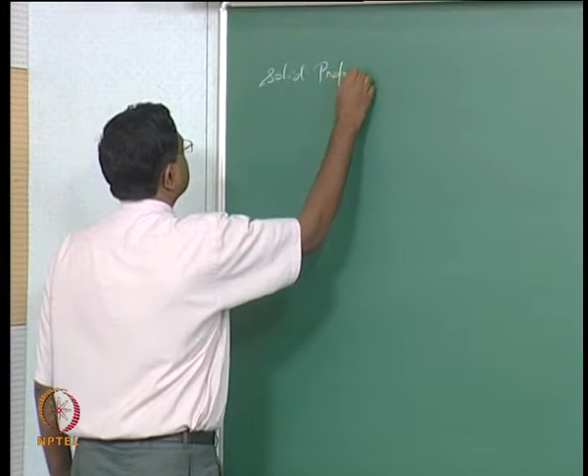The reason why we are actually going through all these things in quick succession is to point out that, as far as this course is concerned, whatever we have learned on laminar premix flames and laminar diffusion flames is actually applicable in the context of more complicated application oriented areas, except that the situation is complicated by a lot of other things. For example, in sprays it's complicated by the spray statistics, the diameter distribution and so on. In the case of solid propellant combustion we will see what else happens, and then we will move on to turbulent combustion also to show that the basics we have learnt will be applicable there, and how it's complicated by the turbulence and so on.

So in the case of solid propellant combustion, what we need to understand is essentially we have to look at two cases. One is homogeneous propellants, and the other one is heterogeneous propellants.

The term propellant actually means that both the fuel and oxidizer are available in solid form together, and the question basically is to what level they are really mixed together. So in the case of homogeneous propellants, they are actually mixed up to the molecular level. So fuel and oxidizer are mixed at molecular level.

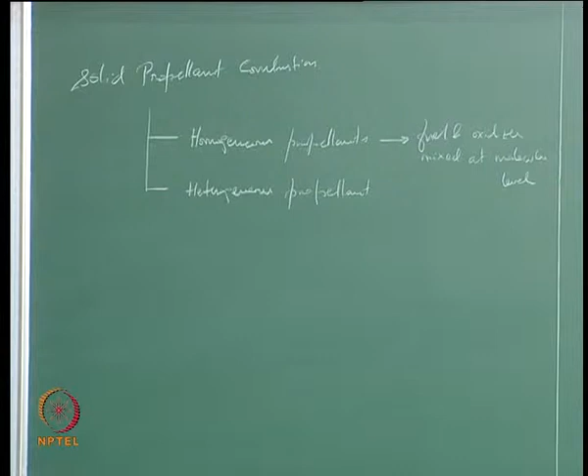That means when you now have a source of heat that ignites it, and then the combustion keeps going under steady state conditions, essentially what happens is the solid gets heated up and it is thermally unstable, so it decomposes into gas phase products. The gas phase products are essentially gas phase fuel molecules and oxidizer molecules, which then in turn break down further to react in a gas phase flame, and the gas phase flame releases a lot of heat that goes back to giving rise to the condensed phase decomposition products of fuel and oxidizer molecules in the gas phase. So that's how it happens.

As a matter of fact, when we're looking at liquid droplets, there are also monopropellant liquid droplets, where you can actually have a premix flame surrounding the monopropellant liquid droplet, and it pyrolyzes the droplet, and the droplet decomposes into gas phase fuel and oxidizer molecules that react in the gas phase flame. So a similar idea essentially prevails for homogeneous propellants.

An example of this is the most common thing, what is called double base propellants. It's called double base because it's actually a combination of nitroglycerine and nitrocellulose. They are mixed together such that they form a mixture at the molecular level, and then they decompose into a gas phase fuel and oxidizer.

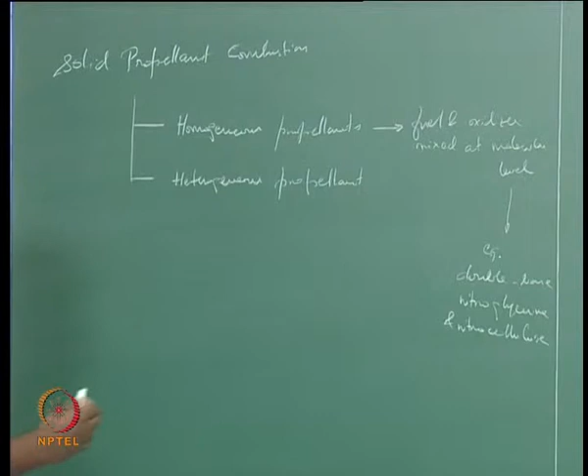On the other hand, before we move on to heterogeneous propellants, obviously what we are looking at here essentially should give rise to a premixed gas phase flame, and so you can think about a premixed gas phase flame where the preheat zone now extends into the solid, because the preheat zone essentially is where the heat conduction happens, and the heat conduction now happens into the solid, heating it up from its initial temperature up to a surface temperature that needs to be determined as part of the problem.

This surface temperature is determined by supplying interface boundary conditions between the solid and the gas phase, and in addition to that you still have the same eigenvalue problem, which is you have to find out the burning rate of the solid, or the rate at which the surface regresses. That's essentially similar to the way we did the gas phase flame one-dimensional flame structure analysis. In the case of heterogeneous propellants, essentially the fuel and oxidizer are mixed at a particulate level.

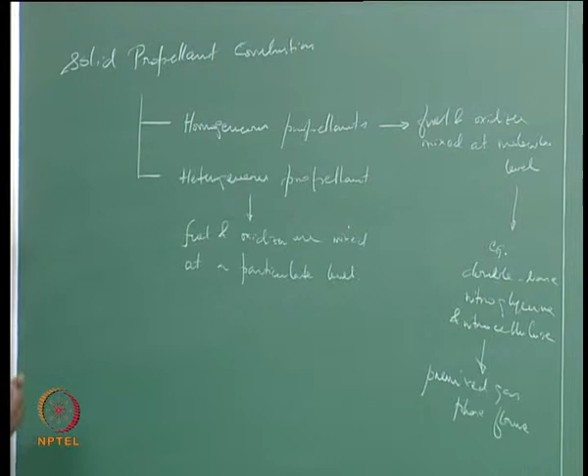This is very typical, though it doesn't have to be exactly followed this way. Typically we have a solid oxidizer powder, which is a chemical salt, and the most typical one used is ammonium perchlorate. It looks like common salt particles, but can come in various particle sizes, and these particles are embedded in a polymeric fuel.

This starts out with a polymer that is a highly viscous liquid into which you mix things, and then you set this polymer to become a solid. So the fuel is essentially a polymer that also acts as a binder that binds the particles. You can also throw in metal particles as further fuel, but the metal combustion actually happens outside of the combustion between the fuel and oxidizer.

Effectively, the binder and oxidizer combustion propagates the flame into the solid, caused by a flame between the fuel and oxidizer. So this is going to actually look like it has a lot of solid particles.

Typically these particles are about 200 to 300 microns in size. The finer ones could be as fine as 5 microns or even 1 micron in extreme cases, but typically it's on the order of 50 to 70 microns, 80 microns, maybe at most 100 microns. So essentially you try to have a very tight pack of large solid particles, and then pack the crevices formed between these big particles with further smaller particles.

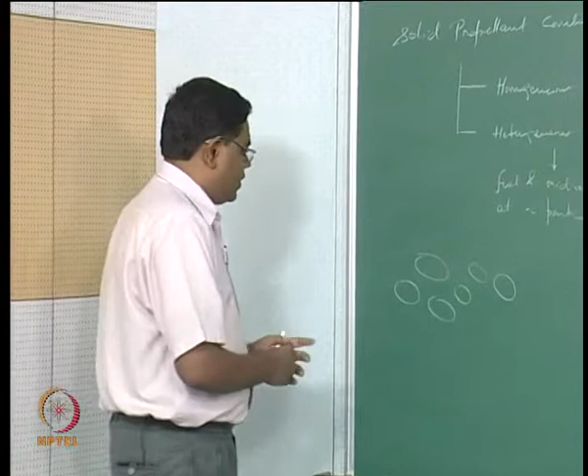So now you get these particles, and a binder binding the whole thing together. Microscopically, when a flame is trying to eat into this, it is obviously not going to be a premixed flame. Even at the microscopic level, suppose we hypothetically cut it with a surface like this, and say that is now the burning surface. Obviously the burning surface is not going to be as flat as this, and we'll see how the non-planarity develops.

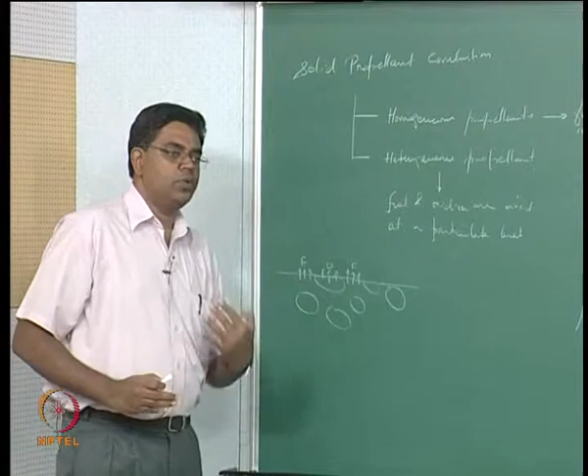But let's suppose this is what we want to think about: you have an exposed area of oxidizer giving rise to oxidizer vapor, and an exposed area of binder giving rise to fuel vapor. So fuel here, oxidizer here, fuel here - if you look at it like this, within this region it's sort of like the inverse of the Burke-Schumann problem. The Burke-Schumann problem had fuel in the core and oxidizer on the sides, but here we're essentially looking at two different reactant species coming out in this fashion.

So we expect to actually have a diffusion flame associated with this. Recall we talked about flux boundary conditions, so we can deliberately ask where exactly the stoichiometric surface is going to attach - is it at the contact between the oxidizer and fuel, or away? These kinds of issues remain to be discussed in these problems.

But we also talked, when discussing diffusion flames, about finite chemistry effects, particularly near the leading edge, and found that we need something like a leading edge flame or a triple flame structure. That is pretty much expected in these propellants, because it turns out that the oxidizer is actually a monopropellant by itself. It can burn by itself, but we need the binder to hold the oxidizer particles together and push it closer to a stoichiometric situation. Therefore you essentially have an oxidizer-rich reactive mixture, and in fact it can also go through self deflagration.

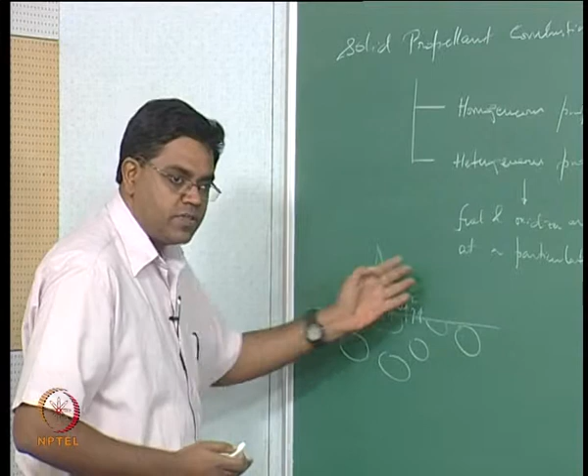So you do have a self deflagration flame of the oxidizer very close to the oxidizer particle, out of which you now get oxidizer-rich products of this flame, which mix with the binder fuel gaseous species. Since you now have an oxidizer-rich species, you're going to have more like a triple flame rather than a diffusion flame that extends all the way.

Typically modelers have identified that you now have a monopropellant flame for the ammonium perchlorate, then what's called a primary flame - the diffusion flame coming from the triple flame idea at the corners - and then the trailing diffusion flame. So a typical idea of multiple flames prevails for what are called composite propellants.

Heterogeneous propellants are also generally termed composite propellants because they are composites of particulates in a binder, similar to composite materials and structures. The popular idea is that you have multiple flames of different structure prevailing on top, and you also have aluminum metal particles embedded in it.

Aluminum is thermally very stable, so as it comes out it accumulates on the burning surface because it is just barely getting melted at that time, it is not ready to actually get evaporated.

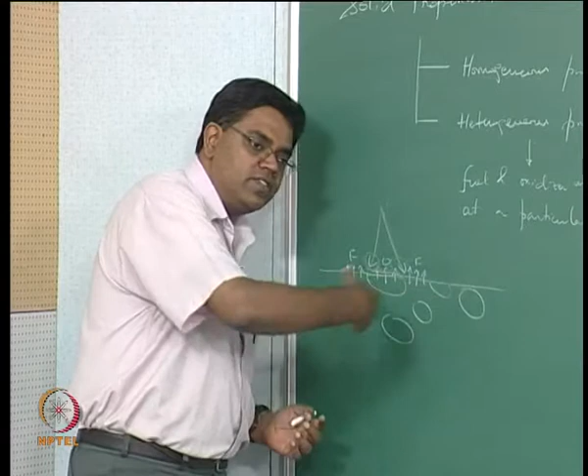As it accumulates, it forms a sintered web and gets heated up by the gas phase flame complex, ultimately reaching an ignition temperature by which it gets ignited. The sintered web then rolls out, goes up, and starts burning as a bigger agglomerate than the individual particles we originally had.

That's a complex problem with a lot of ramifications in solid rocket performance where these kinds of propellants are used. All I want to point out is we've discussed many of these issues in trying to do laminar flames earlier, and all these ideas remain here as well.

So we now want to do a similar overview of turbulent combustion. To say we want to just give an overview of turbulent combustion is extremely unfair, because it's a subject that has spawned a huge amount of literature. A lot of scientists have been working on it, and turbulent combustion is one of the things that has funded a lot of combustion research in the last many decades.

That's primarily because most practical combustion, barring some situations happening at very microscopic scales where the Reynolds numbers are so small, is turbulent in nature. So we're looking at gas turbine combustors, liquid rocket combustors, furnaces, boilers and so on. In most combustion situations you're going through, you have turbulent flow.

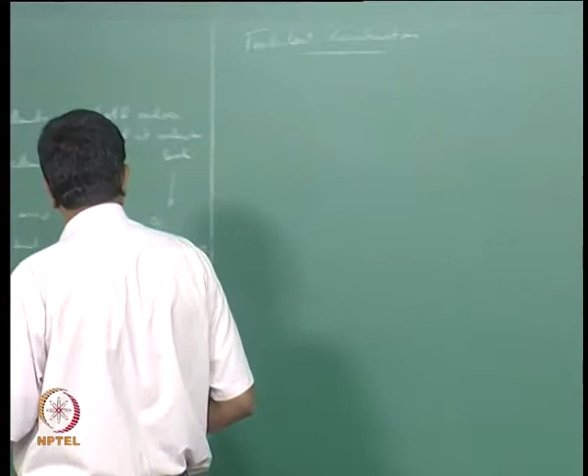Similarly, we have to go back a little and get a quick overview of what is turbulent about turbulent combustion. That means we have to look at what turbulence is in general. We will try to restrict what we're doing here to the context of turbulent jet flames.

When I say turbulent jet flames, I'll talk about both premix flames and non-premix flames. So consider turbulent jet flames - this is very generic, because essentially if you have a little nozzle from which a gas comes out at turbulent speeds, like a jet, you'll have a lot of eddies here and there.

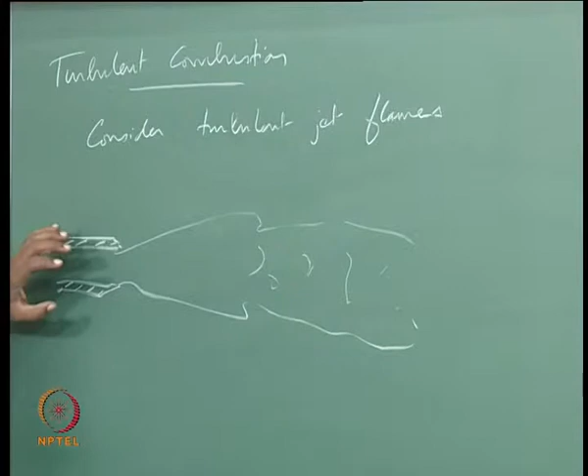It's a caricature that I don't want to elaborate too much on. So we now have a large turbulent jet. You can think of this as coming out of a burner fitted to a combustor or a furnace - this is a very practical situation you come across in many applications.

When you say turbulent premix flames, you could think of a reactant mixture coming out here and then letting in air from the sides entering the jet. Or for a turbulent non-premix flame, you could say I have only fuel coming through this, entraining air around it, and then you have a flame.

So either way, depending on how that happens - if you now have premixed reactants, you're going to have a highly wrinkled premixed flame that burns and consumes all the reactants within a very short distance. And recall, if you now have only fuel, you're going to have a diffusion flame.

The picture I'm drawing is essentially something like the stoichiometric surface. Just like how we did the Burke-Schumann problem, if you mark the mixture fraction corresponding to the stoichiometric contour, you now get a turbulent flame. What's turbulent about it? You now have fluctuations that keep happening.

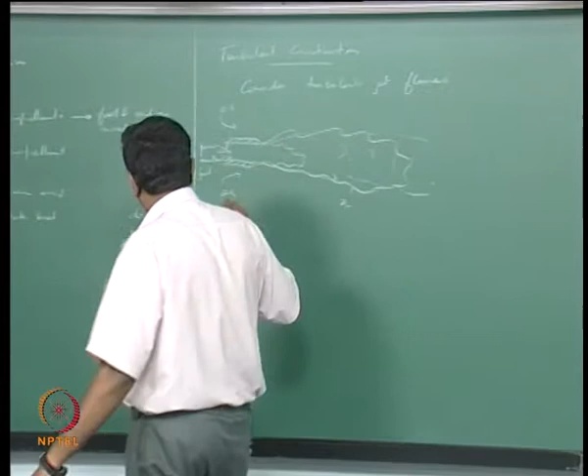The next snapshot you take is not going to exactly follow the same contour. This is an instantaneous picture, so the next one is going to be slightly different, and the third one is going to be slightly different.

Then you keep taking these snapshots and put them on top of each other. You now get lots of these curves which form a band, and that is what you would call a turbulent flame brush. It essentially causes a brush-like structure in an ensemble-averaged manner.

Similarly, for the premix flame, let's go back and think about the laminar situation. We talked about the Bunsen burner experiment, where you have a hole at the bottom allowing air entrainment, setting up a premix flame. Then you start closing the hole gradually, converting this premix flame into a diffusion flame. We find that the diffusion flame is a lot taller compared to the premix flame.

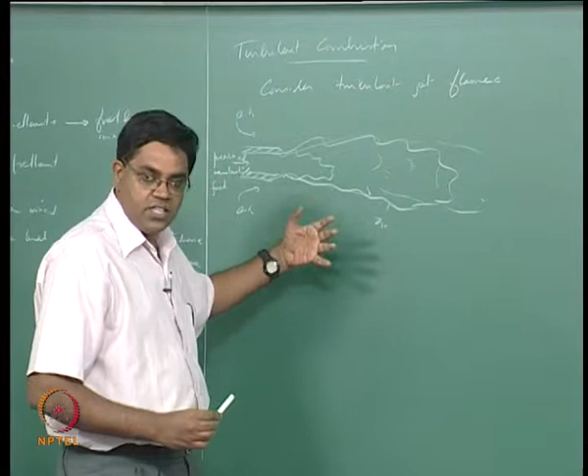A very similar situation exists for turbulent flames, simply because in diffusion flames, combustion is diffusion controlled, so the heat release isn't as intense, because the chemical reactions are waiting for mixing to happen. Whereas in the premix flame, you don't have that constraint, so the heat release is kinetically controlled, and you get a lot of heat release within a very short region.

So the volumetric heating load from a premix flame is a lot higher compared to a diffusion flame. For this reason, for the same thermal loading—meaning the amount of fuel you're trying to burn at a particular rate—your premix flames are typically very compact compared to diffusion flames. This is true both in laminar and turbulent flows.

If you want to think about this, just like I described the stoichiometric surface for the diffusion flame, you could also think about a local turbulent flame speed that is trying to match the flow and set itself up. And there we have a little problem.

Am I going to say this instantaneous flame is the one traveling at a turbulent flame speed, or is it like a turbulent premix flame brush that is traveling at a turbulent flame speed? So the notion of what's a turbulent flame speed is a little difficult to think about, and we will have to talk about it in greater detail shortly.

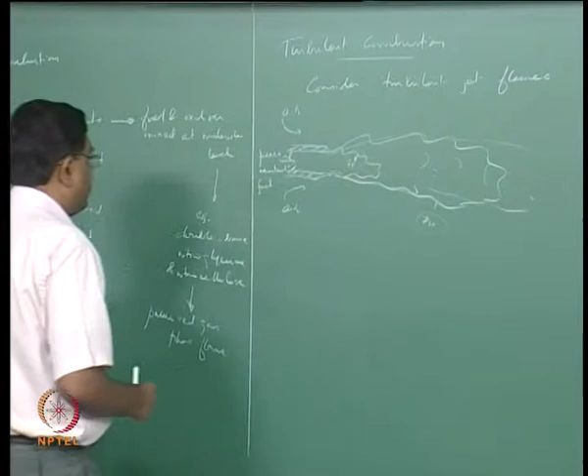The first thing I'm hinting at is, if you're completely ignorant, we will now have to talk about something called a turbulent flame speed as opposed to a laminar flame speed. We got a hint of it when we used SL, where L is a subscript indicating laminar, and I pointed out that when we think about turbulent flames, we will have to alter that. The point I'm trying to make is the ideas we had—like the flame speed balancing the normal component of the flow—those ideas will remain. That is not going to change.

If you want to think about all these things, the first thing we have to do is forget about flames for a moment. We will now look only at the term turbulent jet. For the sake of looking at the turbulent jet, let's not worry about whether this is premix reactants or a fuel—we'll simply say it's just a jet of some gas, maybe air itself.

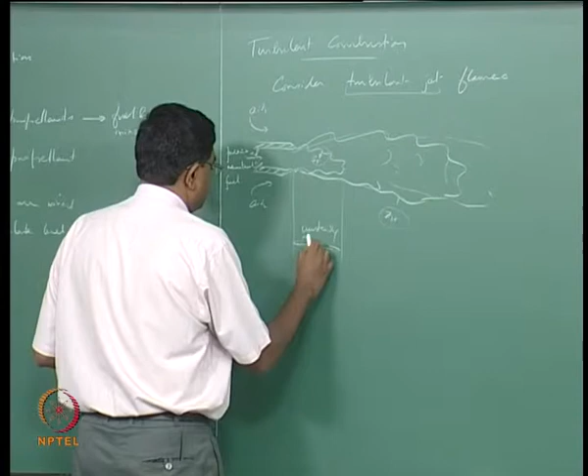In a quiescent air ambience, you're essentially looking at a jet, and in the jet you now have a region that is like an unsteady shear layer, where you have two mixing layers.

We are talking about momentum mixing as well as species mixing and thermal mixing if it is not isothermal. All these things are happening within this region in an unsteady manner. You could hope to view this part as essentially an unsteady laminar case if you're trying to resolve these scales in your computation or whatever it is.

But pretty quickly you're now going to get into a region where you transition to turbulence, and then beyond this point you now have a fully developed turbulent jet. When you're now having a fully developed turbulent jet, we are now looking at a lot of eddies over here, which are primarily homogeneous isotropic.

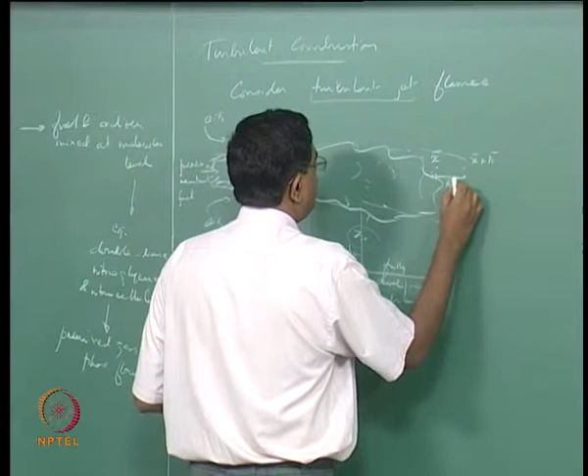So we are looking at a situation where if you now pick a point given by x and another point given by x plus r, distant r apart, then we now characterize this by having a cross correlation between the two. Now if you're now looking at this region where it is fully developed turbulence for homogeneous isotropic turbulence,

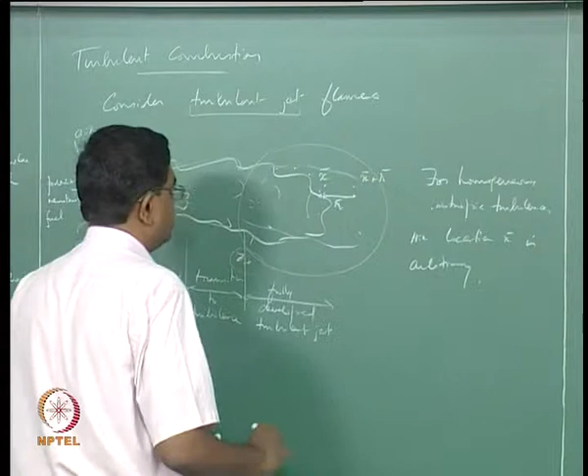the location x doesn't matter. Location x is arbitrary, and all you're looking at is essentially the actual distance rather than the displacement. So that means you don't have to look at this in a vector form. The direction didn't matter because it's isotropic. The location didn't matter because it's homogeneous. Therefore, r can be replaced by mod r, which was, let's say, simply r without the vector, and then what you're looking for is a velocity correlation.

So the starting point of thinking about turbulent flows is to think about a velocity correlation here, that is a spatial correlation. That means you're essentially looking at turbulent fluctuation at x comma t correlated with the turbulent fluctuation at x plus r comma t as an average, right? And then you normalize this.

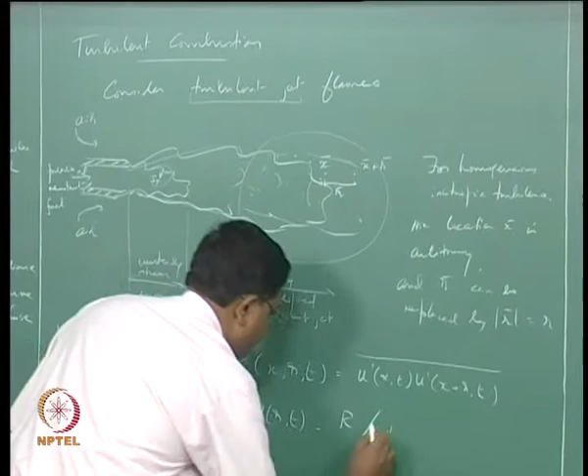So the normalized correlation f of r comma t then is just take the correlation r and divide by the RMS, so u prime squared t the whole bar. And so why are we bothered about this? Because we want to now step into how this looks like.

So if you now look at how the f of r comma t looks like, then it's going to be versus r, let's say. So how does it look like versus r? It typically goes, it's normalized, so we don't have to worry about the magnitude. It goes asymptotically to 0 as you go further out in r, and with respect to this we could now say somewhere along here we have a length scale eta, which we would now call the Kolmogorov length scale, and somewhere in here we would now have a length scale L, which we would call the integral length scale. We will talk about these things a little bit more carefully, so let's not worry about them at the moment. We're trying to write down...

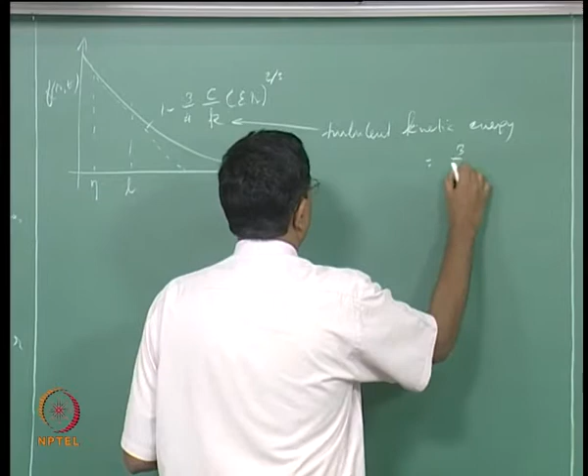But what I'm interested in is if I can actually have a function that approximates this to good measure, and that would be 1 minus 3/4 c over k epsilon r to the 2/3, where k, what we're talking about, is the turbulent kinetic energy, which is equal to, for isotropic turbulence, 3/2 u prime squared, where u prime of course is the fluctuation over the mean of the velocity, and epsilon is the dissipation

and c of course is what's called the Kolmogorov constant, and then we want to talk about what is the integral length scale. Integral length scale L of t then is the integral from 0 to infinity of f of r comma t dr, that is essentially the normalized correlation integrated over all distance, and then you now get a measure of a scale that kind of captures the large scale structures.

So we will see what that means pretty soon, and then you now have what's called the Kolmogorov length scale, which is the smallest length scale in your flow. Essentially what's happening is you now have a turbulent flow in which you now have a cascading that goes all the way down to the Kolmogorov length scale. So eta is nu cubed divided by epsilon, the whole to the 1/4, where nu is the kinematic viscosity, and of course epsilon is what we call the turbulent dissipation, as mentioned before.

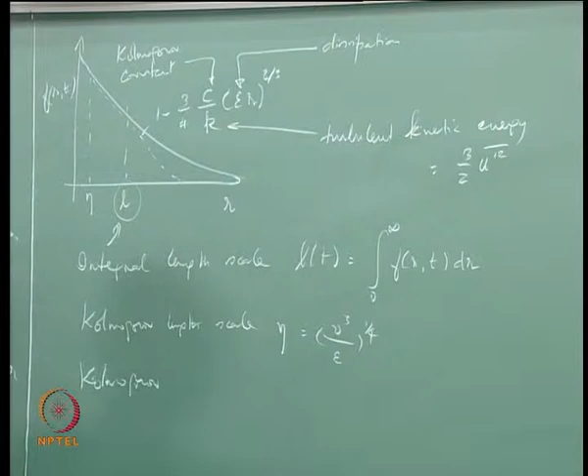All right, we will also talk about a Kolmogorov time associated with the length scale, and we will talk about these time scales, length scales, and the velocity associated with these for many of these scales, but at the moment we are discussing the Kolmogorov scale.

So Kolmogorov time t eta is nu over epsilon to the half, and Kolmogorov velocity V eta is nu epsilon to the 1/4, right?

Between the large scale and the Kolmogorov scale, we could now think about a discrete sequence of eddies, and the reason why we are talking about these things is because ultimately we want to compare these things with a laminar flame thickness. When you talk about combustion, we have length scales and time scales associated with the flame and the flame speed. So we want to be able to compare these scales with those of the flame, and we now talk about a discrete sequence of eddies.

Discrete sequence of eddies within what's called the inertial subrange. I'm going to explain this soon, with the energy spectrum, but let's first, it's kind of like a chicken and egg thing. So we first have to talk about the cascade and then the spectrum, or vice versa.

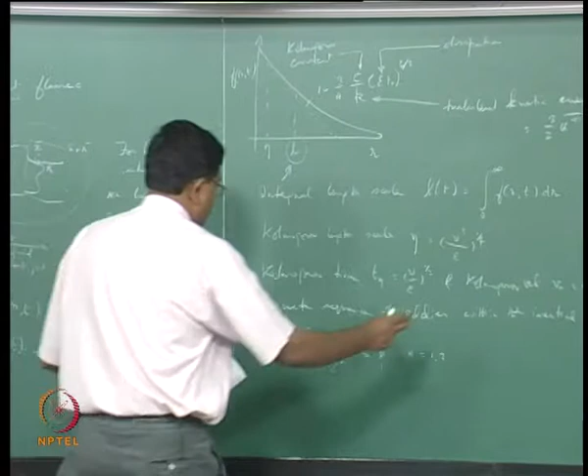And what we can find out is that in this inertial subrange, essentially the dissipation remains constant. You have a constant dissipation mechanism that works on these eddies. Therefore we could now say that epsilon is essentially like Vn squared divided by Tn, where Vn is the velocity associated with the nth eddy, and Tn is the time associated with the nth eddy, and this would be the same as V eta squared by T eta, where V eta and T eta are essentially the Kolmogorov scales.

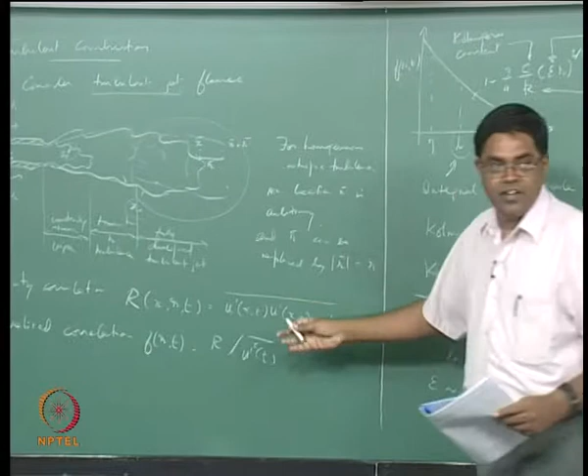Then the next thing we want to think about is what's called the wave number. For some reason the turbulence community is very fond of K, maybe because of Kolmogorov, they like Kolmogorov a lot, so they keep using K for the turbulent kinetic energy as well as the wave number. So this is typically like 1 over the length scale, and what we are looking for is the energy density, which is the kinetic energy density per unit wave number.

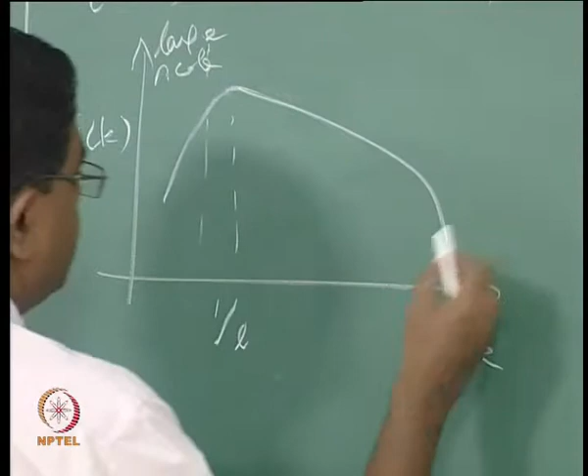Okay, so we can now think about a spectrum, right? E of k versus k, and usually we are looking at a spectrum that kind of looks like this, and you can now think about a division here: this is the large scale, and this corresponds to 1 over L, which is the integral length scale, and this corresponds to 1 over eta, the Kolmogorov length scale. We are looking at this region as the energy containing eddies, or energy containing integral scales, and this region is now referred to as the inertial subrange.

Where you now have a constant slope of minus 5/3, that's a famous law there, and then below the Kolmogorov length scale is the viscous subrange. So essentially what's going on is turbulent flows are of such high Reynolds numbers, based on the large scale, that you have a predominant inertial effect over the viscous effect as you keep going down to smaller and smaller scales, until you reach the Kolmogorov scale, beyond which the viscous effects begin to be important, right?

So this is how this thing pans out. So it's kind of like 10-15 minutes of turbulence, or less than that maybe, right? Just about enough for us to think a little bit about what happens when you now throw in a flame on top of this.

So then what we want to do is think about premixed turbulent combustion. Now,

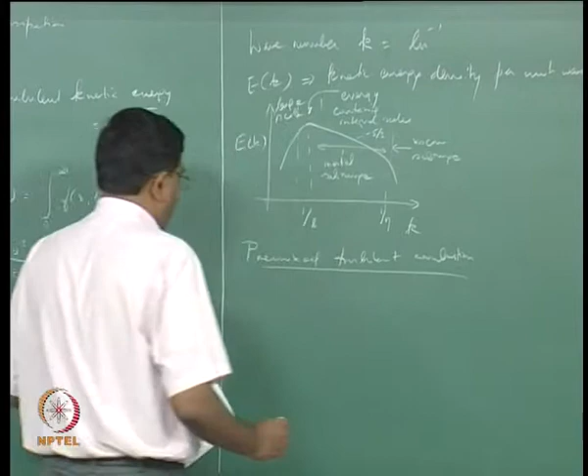The first thing I would like to point out as an empirical fact or observation is when you now have a turbulent flame, it propagates a lot faster than a laminar flame, the corresponding laminar flame. How do I get there, right? How did I get to that point?

Essentially what it means is now you have a lot of these eddies in the flow that are trying to wrinkle or corrugate this flame, and you now have on the whole a flame that looks thicker and wants to reach ahead of itself. It's a very crude way of thinking about this, and we have to think a little more refined, but effectively it now gives rise to a larger flame speed when compared to the laminar flame.

If you now thought that the laminar flame speed under typical conditions is of the order of a few tens of centimeters per second, the turbulent flame speed is about an order of magnitude more, so they are in the range of meters per second. Still quite smaller when compared to most of the flow speeds that occur in, let's say, a gas turbine engine.

So if you think about a gas turbine engine, we're still looking at subsonic flows - we're not talking about supersonic combustion here, maybe not in this course. We are looking at highly subsonic flows. We went through this long ago when we wanted to show that the pressure remains more or less constant in low Mach number conditions, and we said the Mach number is of the order of about 0.1.

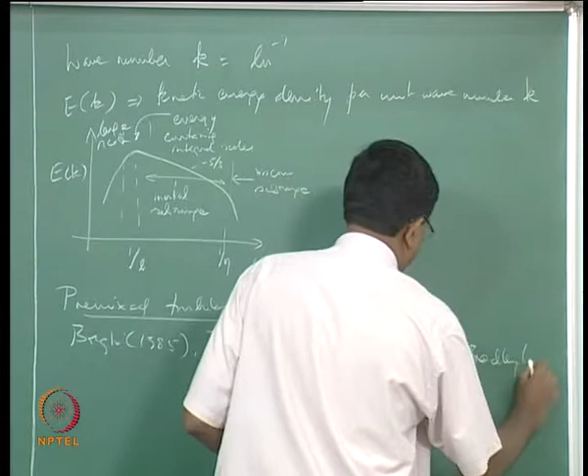So the idea of turbulent flame regimes comes from several investigators in the late 80s. The first is Borghi, 1985. In fact, early researchers used to call this regime diagram the Borghi diagram, but it's also been put forward by Peters and refined further by Bradley and co-workers around 1989, and Poinsot et al. Many of these people are still active researchers in the community, so you can see this is not very old - it's only about 20 years old idea.

So what we want to do here is assume a unity Schmidt number. That means we don't want to make a big distinction between viscous mixing and molecular mixing. SC, which is nu over d, we'll now take as 1, and we now go through a few definitions.

So define our flame thickness, LF - capital F refers to flame, not fuel, and we'll stick to this when we are doing diffusion flames as well - equal to d over SL. And using SL, we are thinking about essentially a laminar flame that is going through a state of wrinkling and so on when it is subjected to the turbulent eddies.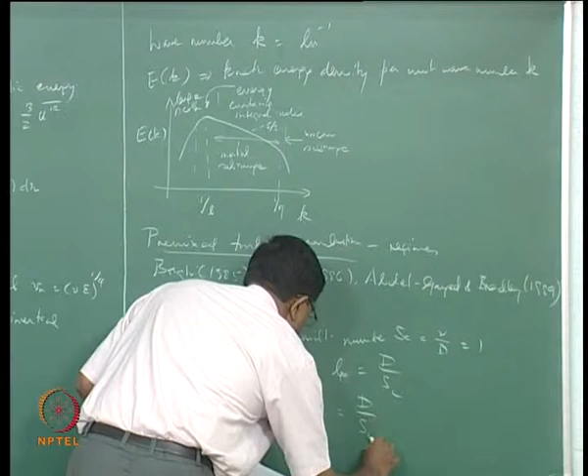And then we want to now construct an idea of what a turbulent flame looks like from essentially a laminar flame. So we are using a laminar flame speed, and then you have a flame time, Tf, equals d over SL squared - let's see, an order of magnitude expression that you would get there.

So we want to define a turbulent Reynolds number, defined as RE equal to, let's say, V prime L over nu, where V prime is the turbulent intensity. It's a measure of the fluctuation, the turbulent velocity fluctuation. It comes from how you can define your kinetic energy - that means you can say you're looking at something under square root, which is basically 2/3 K to the power half.

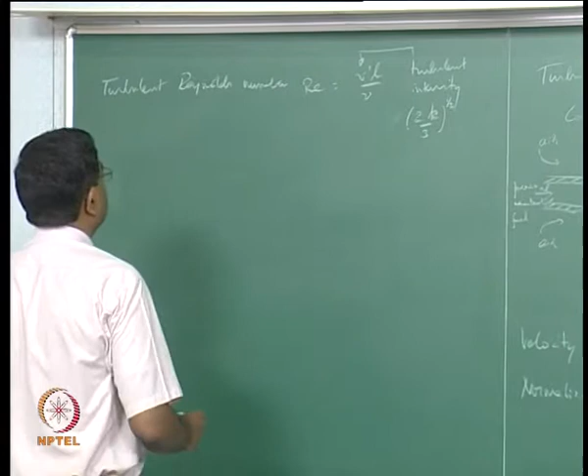So that's where the turbulent intensity comes from, and L is the integral length scale, and nu is the viscosity. Since we are using Schmidt number equal to 1, this is actually V prime divided by V prime L divided by D. We defined the flame thickness as LF equals D over SL, so D is LF SL, so this becomes V prime L over SL LF. It's sort of like a velocity ratio

times the length scale ratio. The velocity ratio compares the turbulent intensity versus the flame speed, and we compare the integral length scale of the turbulent eddies with the flame thickness. I'm trying to implant this idea because that's the way we're going to think about this. The next thing we want to think about is a turbulent Damkohler number.

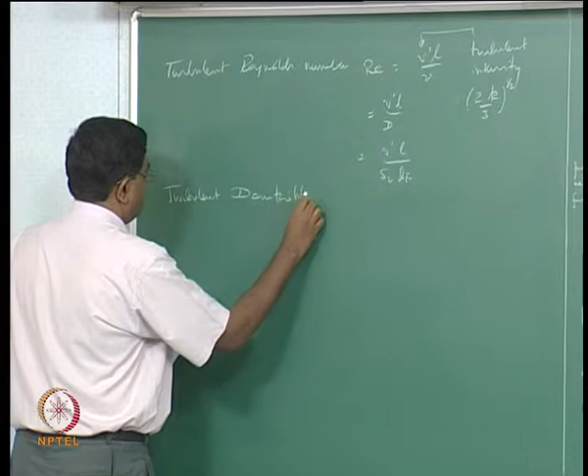Damkohler number is something we have come across earlier, which is essentially flow time divided by reaction time. It compares your flow time scale by the reaction time scale, and typically it's quite large because it takes a lot of time for the flow to make a significant movement, like over a characteristic length scale of the geometry, compared to the time it takes for the reactions to happen. So Damkohler number is now defined based on this, but you'll find it's a little different from the way Reynolds number turns out to be.

This is essentially time scales. It's actually SL L divided by V prime LF. So it's coming from L over V prime for the flow time, divided by LF over SL for the chemical time. It's sort of like saying this looks like this and this looks like that - they kind of look very closely similar, but they're not. So keep in mind, don't get confused about this.

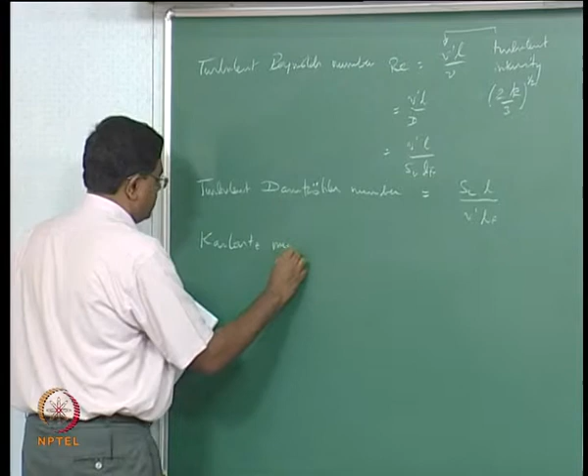And we now have a Karlovitz number, Ka - so Damkohler number has the symbol dA. Karlovitz number has the symbol Ka, which is effectively Tf, the flame time, divided by the turbulence time. So you can say this is Lf squared divided by eta squared in terms of length scales, or you can say V eta squared divided by SL squared, whichever way you want to say it.

In all these cases we are looking at basically the ratio of flame scales to Kolmogorov scale - flame scales because it could be time scale, length scale, whatever, compared to Kolmogorov scales. And with these we should be able to show Re equals dA squared Ka squared. So that sounds like dA is equal to square root of Re. That's one way you could remember it.

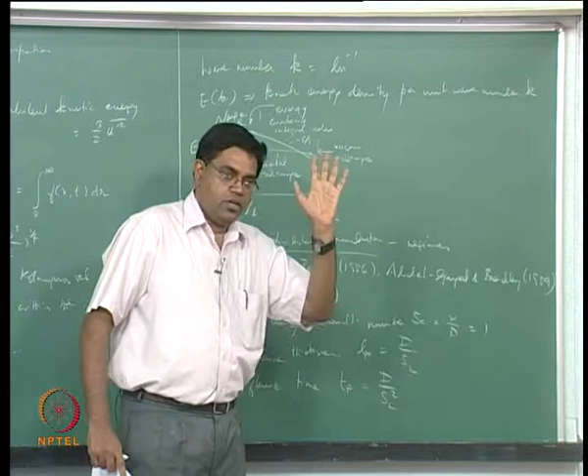Now, what we have been thinking about for a laminar flame is pretty much the same as what we thought earlier, which means it has a preheat zone and a reaction zone. The flame thickness is mostly preheat zone. Typically for a high Damkohler number or high activation energy situation, your reaction zone thickness is quite small compared to the flame thickness itself, and it's given by what's called the Zeldovich number, or the Zeldovich scaling. So you can scale the flame thickness by the Zeldovich number to get the reaction zone thickness. We did this earlier when talking about laminar flames.

So we can now form a second Karlovitz number based on the reaction zone thickness alone. The reason we're thinking about this - recall we were talking about these things as well as the turbulence length scales, because we want to compare how the turbulent length scales are going to be relative to the flame thickness. As you keep changing the regime, you first have a situation where the turbulent length scales are much larger than the flame thickness, but as you change the regime further, you get into a situation where the turbulent scales are small enough to enter the preheat zone but not the reaction zone, and ultimately can even get smaller than the reaction zone.

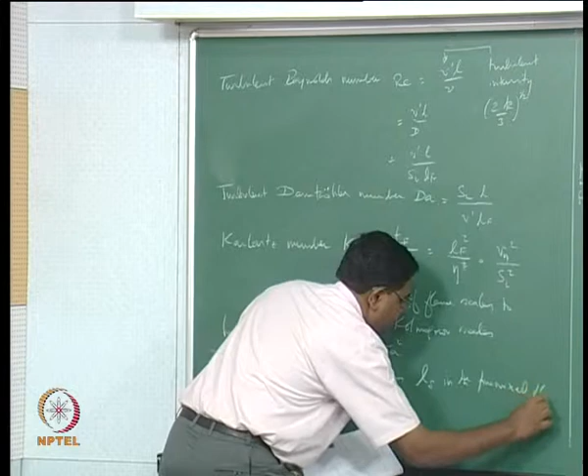So this is how we want to go through it, and therefore we also want to keep track of the reaction zone thickness alone rather than just the flame thickness on the whole. So for reaction zone thickness, L delta, in the premix flame, a second Karlovitz number Ka subscript delta can be defined as L delta squared divided by eta squared. We are still comparing this with the Kolmogorov length scale, and we can show that this is equal to delta squared Ka, where delta squared is essentially the Zeldovich scaling coming between the flame thickness and the reaction zone thickness L delta.

We will just stop today with showing this - this is probably a good time to stop. I think we've finished these definitions, and we will pick up from here tomorrow.

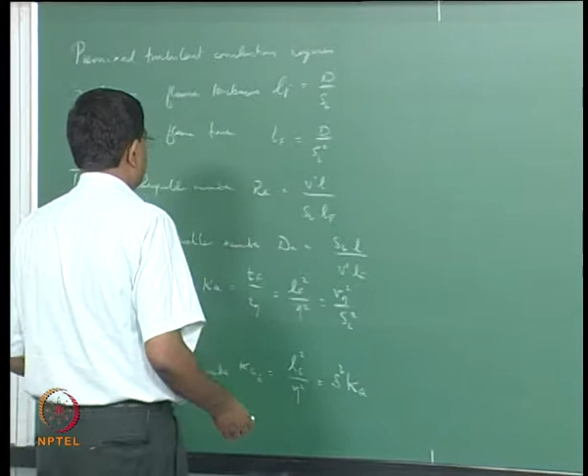So we have these definitions for pursuing the idea of regime diagram for premixed turbulent flames. In this process we have assumed that the Schmidt number equals 1. So let us suppose that for scaling purposes...

Take the turbulent dissipation as V prime cubed divided by the integral length scale. We could only show typically that it's of the order of, but let's suppose that we take it as equal to, then...

Putting things together, essentially what you're looking for is an expression for V prime over SL in terms of non-dimensional quantities, specifically L over LF. We should now be able to show that this is equal to Reynolds number times L over LF to the -1, and that's also equal to Karlovitz to the 2/3, times L over LF to the 1/3.

Why are we doing this? Because that's what the regime diagram is all about. The regime diagram is one on...

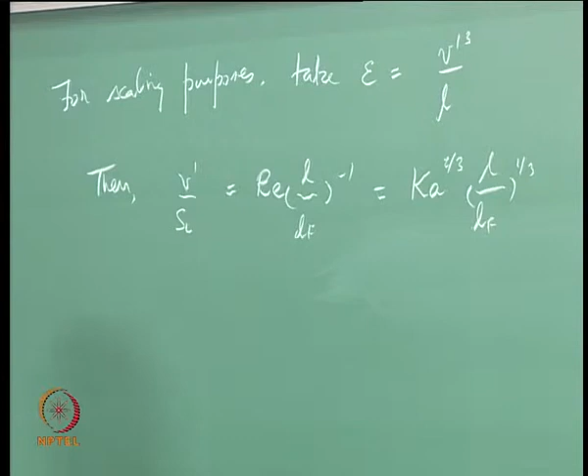What this basically means is that when you want to talk about turbulence, you characterize it in two ways. One, what are the length scales involved in the turbulent flow that we are talking about. The other, what is the intensity that is involved. So these are the two things.

Essentially, it's sort of like a time signal kind of thing. What you're talking about is what are the frequencies involved and what are the amplitudes involved, right? So these two things essentially indicate that, and for both the parameters, what you're looking for is to compare these two with their corresponding flame related quantities.

That means we are saying, can we now look at the turbulent length scales in comparison with the flame length scale, like the flame thickness? So are we having typical eddy sizes that are bigger than or smaller than the flame thickness?

That's on one side as far as the scales are concerned. As far as the intensity is concerned, when you have a flame trying to propagate at a particular speed, if the flow out there is fluctuating at a certain intensity, and if the fluctuation is very small, then as the flame begins to propagate, it doesn't really go through any jitter. It's so small that the flame can just go through without even realizing it went through a fluctuation. Then you don't really have a turbulent flow at all.

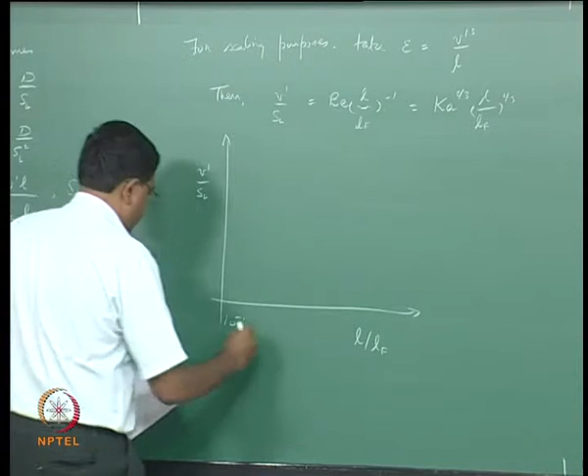So we'll now have values thrown in on a log plot. This is actually a logarithmic diagram. We will look at 10 to the -1, 10 to the 0, 10 to the 1, 10 to the 2, 10 to the 3, etc., or maybe just one more space for 10 to the 4. Similarly over here, we could look for something like a squarish picture: 10 to the -1, 10 to the 0, 10 to the 1, 10 to the 2, 10 to the 3, and so on.

What we want to point out here is that the relationship between V prime over SL and L over LF through Reynolds number is one of an inverse relationship. That is, this goes as 1 over that, with the Reynolds number as a coefficient. Therefore, for a normal plot, it should actually be like a rectangular hyperbola forming the relationship between V prime over SL and L over LF for constant Reynolds number.

This is actually a log-log plot. So in a log-log plot, this shows up as a straight line with a negative slope.

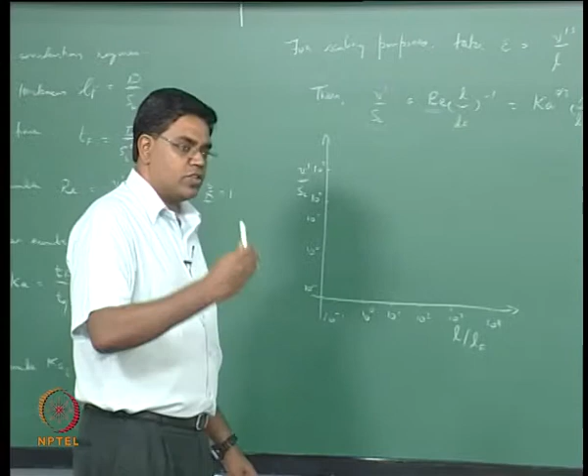In this exercise, we're trying to use, for example, the Zeldovich scaling, using a Zeldovich number value of about 10, which we've seen before when scaling the premix flame thickness to find out how much the reaction zone thickness is relative to the preheat zone thickness.

Correspondingly, we expect that a constant Reynolds number of 1 line is going to be a straight line in the log-log plot with a slope inclined downward for R equals 1, and this regime is essentially what we call laminar flame.

With the turbulent Reynolds number defined this way, this line corresponds to R equals 1. Anything greater than R equals 1 forms the region to the right of and above this line, and anything to the left and below this line is laminar.

So for turbulent flames we are essentially interested in all of this regime. That is point number 1.

Then the next thing we have to look for is how V prime over SL is related to L over LF through the Karlovitz number.

Can we now plot constant Karlovitz number lines? The answer is this goes as 1/3 of that, and therefore in a log-log plot it's a straight line with a slope of 1/3, and the line goes upwards.

So we start at this point corresponding to 1, and draw a line that is Ka equal to 1, Karlovitz equal to 1. We now start from this point.

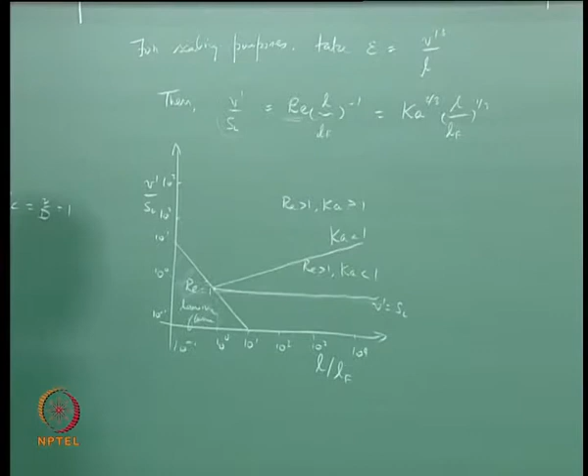So this is a regime where RE greater than 1, Ka less than 1, but V prime is greater than SL. This is a regime where RE is greater than 1, Ka less than 1, and V prime is also less than SL.

Finally we want to look at the situation where the second Karlovitz number is greater than 1. We now have a boundary that goes the same way, because this Karlovitz number is basically delta squared Karlovitz, so they are directly related. V prime over SL in terms of Karlovitz delta, Ka delta, also has a 1/3 relationship with L over LF, with simply a different coefficient, delta squared.

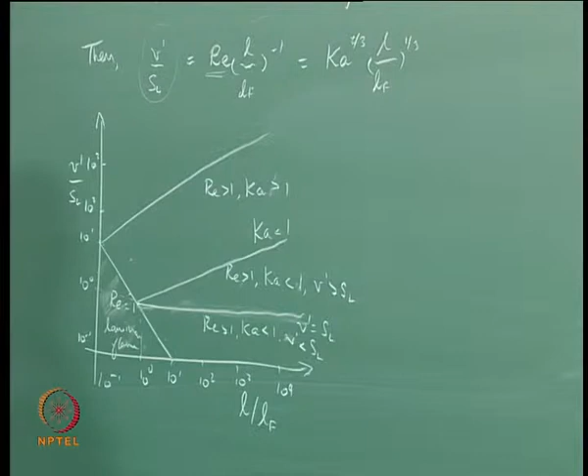Therefore you'll have the same slope, but it starts at around 10 because we're looking at a Zeldovich scaling of 10. These things could be a little off this way or that way, but essentially we get this picture depending on the value of your Zeldovich number, and this line corresponds to Ka delta equal to 1.

So this is Re; you now go back and say Re greater than 1, Karlovitz greater than 1, but Karlovitz delta less than 1. Here we now have Re greater than 1, Ka greater than 1, Ka delta greater than 1.

So that means we now have 4 regimes that we have marked: one based on Karlovitz less than 1 but V prime greater than or less than SL, giving us 2, and when Karlovitz is greater than 1 we still have Karlovitz delta less than or greater than 1. So that is how we are splitting this.

So what is the significance of doing it this way? We are now going to call this the wrinkled flamelet regime, and we are going to call this the corrugated flamelet regime. We are going to call this the thin reaction zone regime or reaction sheet regime.

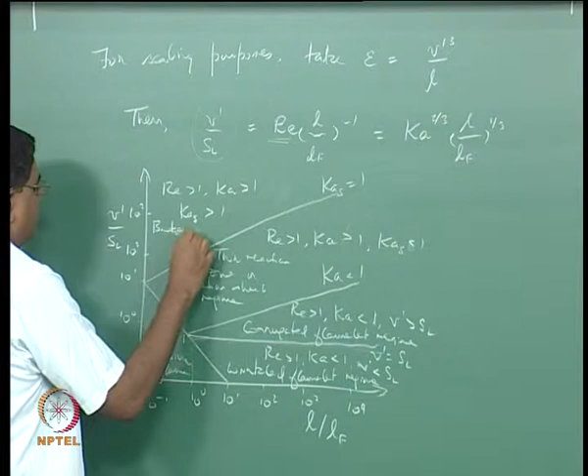You can call it either way: thin reaction zone or reaction sheet regime. And this is what you would call the broken flamelets regime, or the well stirred reactor regime.

It's called differently in different textbooks. So just to make it a little clearer, we could probably use a different color chalk for these 4 lines that demarcate these 5 regions. So the question is why are we calling these what they are? Let's think about what happens in each of these cases.

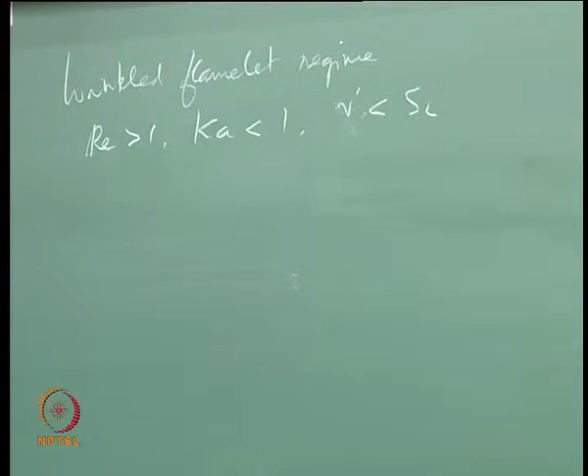The first one is the wrinkled flamelet regime, where Re is greater than 1, Ka is less than 1, and V prime is less than SL. Ka is essentially the ratio of flame time to Kolmogorov time, so it's comparing the flame scales with the Kolmogorov scales. Essentially it means we are still looking at the flame to be significantly thinner than the turbulent scales.

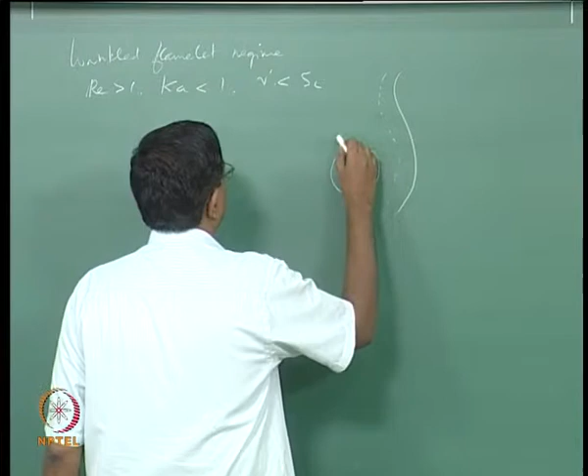Its tangential velocity is Vn depending on the eddy size, and this flame is propagating locally normal to itself with flame speed SL. Since V prime is still less than SL, the intensities are significant enough to make the turbulence felt by the flame, unlike in a laminar flow, but still not enough to penetrate the flame or do anything more. All it does is make the flame wrinkle around the eddy, because the flame is too thin.

We will now progressively get to the point where the eddy sizes are smaller compared to the flame thickness, or the flame is becoming thicker compared to the eddy sizes, whichever way. Then things are going to get a little more complicated.

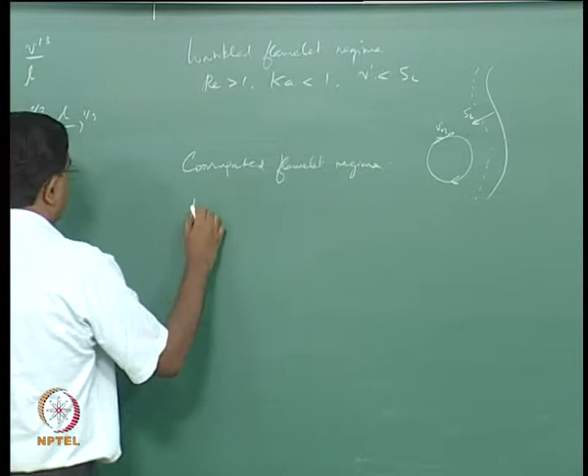The next regime would be the corrugated flamelet regime, where Reynolds number is greater than 1, Karlovitz number is still less than 1, but V prime is greater than SL. This means the intensity is now larger than the flame speed, so the eddies make their presence felt on the flame a lot more. The velocity here is going to be large, and correspondingly the flame has to give way. It gives way by inclining itself to the flow such that only a component of the flow direction is balanced by the flame speed.

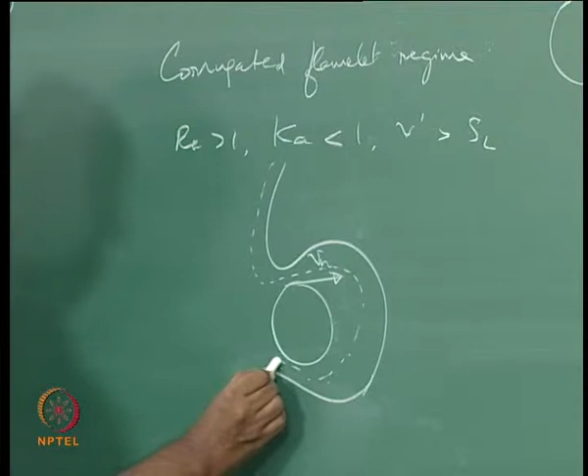So when this begins to increase, think about an eddy with a larger Vn, and a flame interacting with it - it actually begins to curl up to encompass that. Strictly speaking, you could say the corrugation in the flame can now house an eddy comfortably. Previously we didn't have the flame corrugated so much, but now you have a corrugation of the order of the eddy size - that's why it's called a corrugated flame.

Then we get into the thin reaction zone, or the reaction sheet regime. Here Re is greater than 1 and Karlovitz is also greater than 1, and of course V prime is greater than SL - we have gone past that long back.

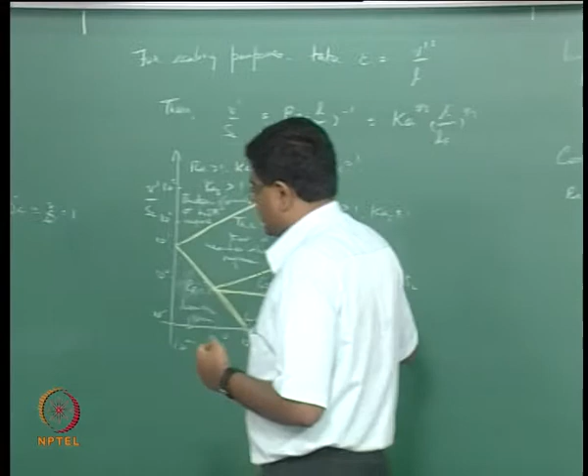And therefore what we are talking about is Karlovitz greater than 1, and that means the turbulent scales are now bigger than... look at this. If Karlovitz is greater than 1, then the flame thickness is now getting to be bigger than the turbulent scales, right?

So what that really means is you're now going to have a flame that has a preheat zone starting out like that, but you now have an eddy that is big enough to penetrate the preheat zone, and then the preheat zone thickens.

Why does the preheat zone thicken? Because you now have a turbulent transport of heat and mass. The job of the preheat zone is essentially transport, where heat from the reaction zone is being transported upstream to the reactants, and mass from the reactants is being transported downstream to the reaction zone. So you have heat and mass transport happening in the preheat zone, which is now, in addition to the molecular transport that happens because of temperature and concentration gradients, also additionally happening because of the eddy.

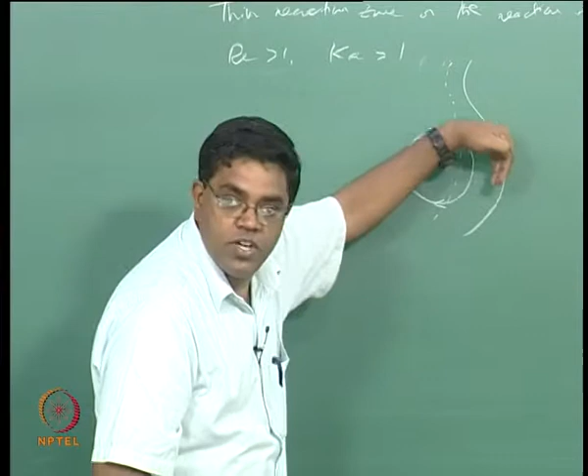That means this eddy is now taking the reactants and putting them into the reaction zone for the reactions to consume, and taking the heat from the reaction zone and bringing it ahead to the preheat zone, heating it up. So if you want to think about this statistically, it's as if you had a fairly thick preheat zone, and the eddy was doing the job of thickening the preheat zone.

So you now can only talk about a reaction zone that is trying to accommodate the eddy, but the preheat zone has been breached. That's essentially what's going on.

So therefore that's the reason why we are calling this a reaction sheet regime. That means all that we can talk about as a characteristic of the original premix laminar flame, the remnant of it, is only the reaction zone. The preheat zone is now marred.

So effectively the way we are thinking about this is, can I hold on to my laminar knowledge? And that's just beginning to get breached here by the turbulence. Until then it's okay.

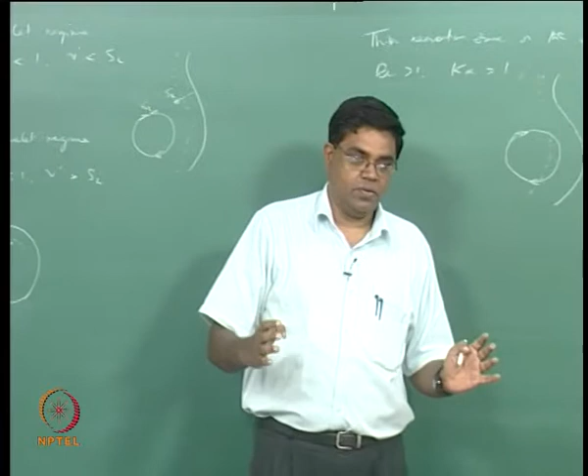And there's a reason why we have been using this term called flamelet all the time, and there is this basic idea of what's called laminar flamelets. That means in these regimes we can still continue to think about the turbulent flame or the turbulent combustion zone as being made of an ensemble of laminar flamelets.

So locally where you have these things satisfied, you can now say it's essentially a laminar flame, but it's interacting with an eddy and therefore it's getting curved or corrugated, wrinkled, right. So you can continue to preserve your idea, because the original local structure of a one dimensional laminar flame...

How we extended from a one dimensional laminar premix flame to, let's say for example, a Bunsen burner, the shoulder of the flame there, or the base of the flame there, or the tip of the flame there, in all these cases we try to accommodate the one dimensional idea.

Locally the flame is trying to match the flow, or it's shaping itself to match the flow, and that happens everywhere still. So you could hold on to that.

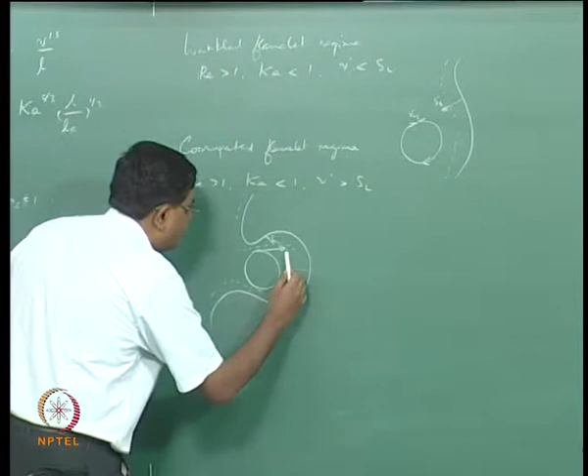That means locally if you now look at these gradients, you can draw exactly the same pictures that you drew, that is the concentrations are now falling down, the temperature is now growing up and all that stuff. That structure is there, but here that structure is breached, except only for the reaction zone.

And then finally you now get into the WSR, or the broken flames. The well stirred reactor, the WSR regime.

Here of course the Reynolds number is greater than 1, and of course the Karlovitz is greater than 1. We got to go back and point out that we still have Karlovitz delta less than 1 for the previous case. That means the eddy sizes are still not small enough to breach into the reaction zone, but that's no longer the case here.

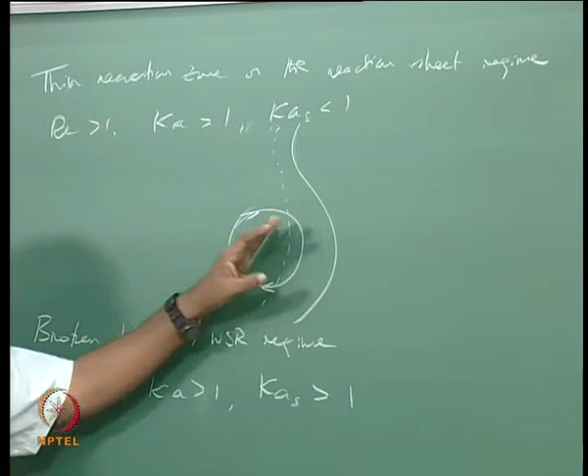So here we have Karlovitz delta also greater than 1. In this case what happens is even the reaction zone is torn apart. That means you now have the flow getting into the reaction zone and coming back again, and locally it can strain the reaction zone and cause local quenching and reignition and so on. So that means you now have the flame torn apart into shreds because of these eddies.

So this causes local quenching and reignition events.

Let's now talk a little bit about non-premix combustion. Non-premix turbulent flames, I'm following Peters here, and there is more work that's been done further out in more recent past, but I'm not covering that material as far as this is concerned. Now the problem with non-premix combustion regimes is we don't have a characteristic flame speed here.

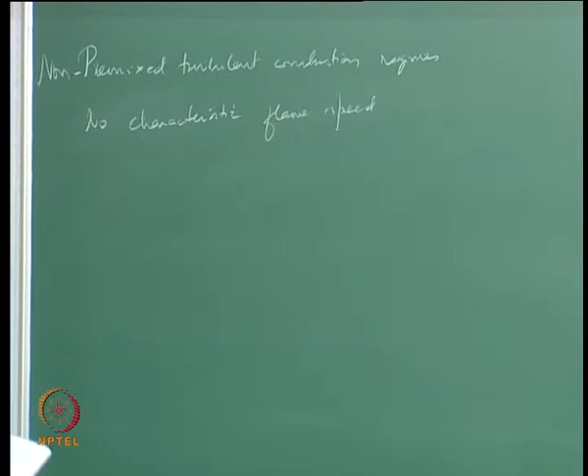Instead, what we want to look at is velocity gradients in the flow, and of course turbulent flames will have velocity gradients in the flow. So if you're now looking at something like a strain rate, let's say it's given by symbol A, and you have something like d(v infinity) by dy for the flame.

It's also related to the pressure gradient in the flow, that is, dP by dy equals rho infinity times a squared, where a is the strain rate. So if you now have a strain rate, the strain rate actually has dimensions of time. This is meters per second, this is meters. So, sorry, strain rate has dimensions of 1 over time.

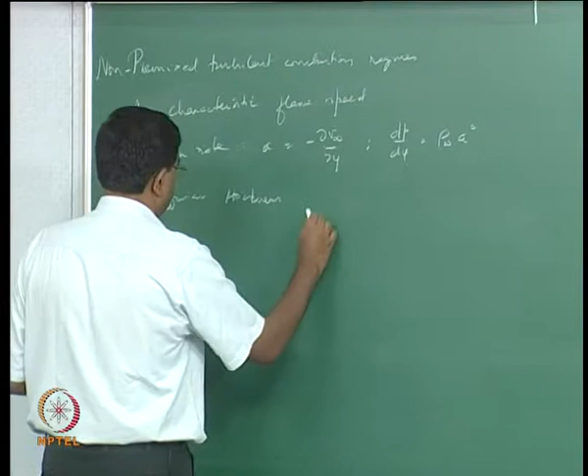So with this we should now be able to come up with a diffusion thickness, LD, equal to D over A the whole to the half. That's like meter squared per second divided by 1 over second, so the 1 over second gets cancelled, and meter squared to the half gives you meter.

So now we are basically looking for something like a characteristic dimension associated with the flame in order to be able to compare with the turbulence. That's what we were doing for the premix flame. There it was rather easy to think about a time and space relationship through the flame speed, but here we didn't have a flame speed, so we are going through this.

The next thing we want to do is not think in terms of physical space, because in diffusion flames the mixture fraction comes up as a very handy tool, and we went through this when we did diffusion flames. When you have diffusion flames, it's one thing to get the flame shape in physical space, but if you want to look at the flame structure, you are better off looking at the mixture fraction space, because there all the concentrations and temperatures are related to the mixture fraction, and if you supply the local mixture fraction you can find out how these things vary.

So in the mixture fraction space, we can now have a corresponding diffusion thickness, corresponding to the diffusion thickness that we have defined, LD. Diffusion thickness in the mixture fraction space now, let's suppose we call this delta Z F.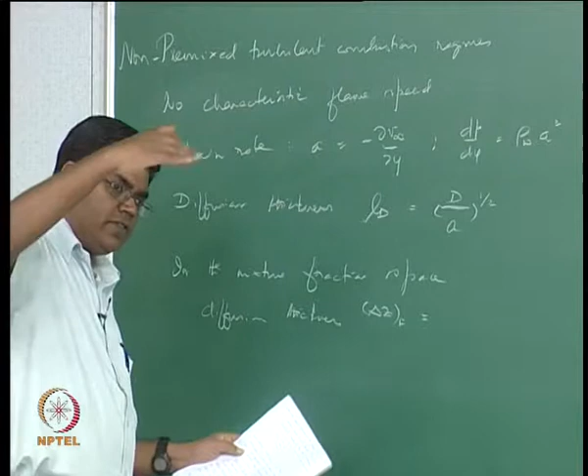Again, the subscript F corresponds to flame here, because we are looking at the diffusion thickness around the stoichiometric surface, since you have the flame and then a certain length scale associated with the flame that the eddy wants to interact with. So in the mixture fraction space, it's always about the stoichiometric mixture fraction where the flame is.

Therefore, what we are looking for is the conversion from physical space to mixture fraction space, which goes through the modulus of the gradient of the mixture fraction at stoichiometric condition, times LD. And we also had the scalar dissipation rate.

So scalar dissipation rate chi, we did define this, and that is twice D times grad Z mod squared. So obviously we can get an idea.

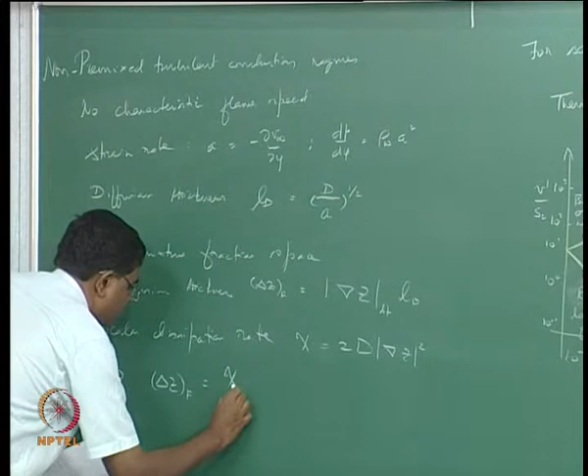Now we want to try to put these two together. So that means delta Z F, the diffusion thickness in mixture fraction space, is chi st divided by 2a, the whole to the half.

Now if you want to make this a bit simpler, you can expand chi st about chi st for small values of z and then approximate, let's say z is not varying too far out from z st. Then chi depends on z, therefore you expand chi about chi st for small values of z. That's like a Taylor series approach.

So expanding chi of z for small values of z about chi st, and when you say small values of z, that means we are approximating, so we can show that...

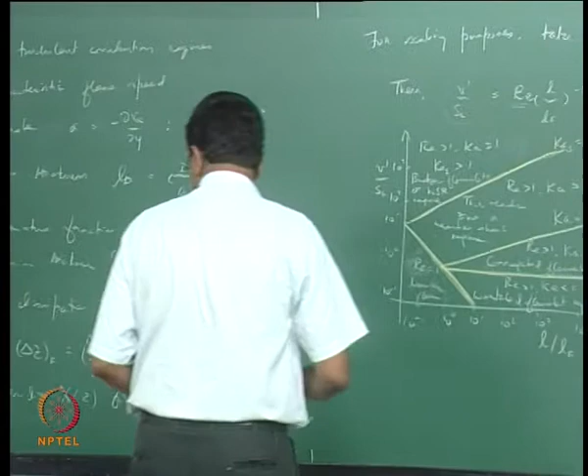delta z F is approximately 2 z st. So this is effectively the counterpart of LF in premix flames, and it should be pointed out that this is mostly the preheat zone.

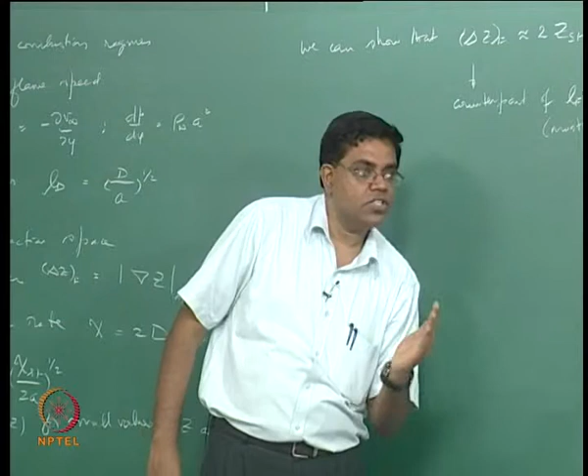We pointed this out when doing diffusion flames - when we did the laminar diffusion flames, the Burke-Schumann assumption was essentially saying that the flame is a sheet along the stoichiometric surface, which was essentially the reaction sheet. It's like saying in the premix flame, if you think about only the reaction zone as a sheet, but consider the thickness of the preheat zone, like the pictures we've been drawing here.

So what happens in the Burke-Schumann problem? You have a flame that is a sheet, like a reaction zone, and you do have transport going on - mixing of fuel, oxidizer, and heat - all happening outside this sheet. The infinite reaction rate assumption says the reaction rate is almost infinite here, but if you zoom in and clarify this reaction zone like we did in the premix flame, we'd find the reaction rate is peaking only at this sheet, similar to how we did in premix flames.

So effectively, up to here we've mainly been interested in the premix flame regime diagram - what's the preheat zone doing relative to the eddies. Similarly, if you think about a corresponding diffusion thickness for the flame, we should be worried about this in the mixture fraction space - how is that going to interact with the eddies - and that is like the counterpart of the preheat zone of the premix flame.

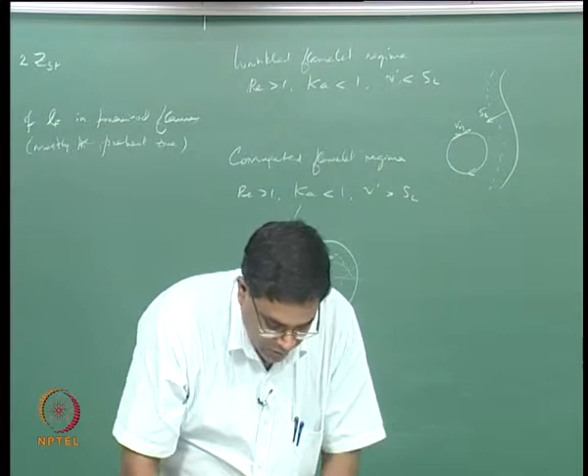And here again the laminar ideas are coming back to help us.

Now, the reaction zone thickness, on the other hand, is the one where you have the fuel and oxidizer consumption zones. We'd like to point out that the oxidizer consumption zone is actually quite larger in reality. That is, if you do actual detailed chemistry for, let's say, methane air flames, you should find the oxidizer significantly leaks out of the reaction zone to a farther distance outside into the fuel region.

So keep that in mind, and we'd like to now call this delta ZR. This is the counterpart of L delta that we had in the preheat zone of the premix flame, and we'd like to relate this to epsilon delta ZF - that means it's a fraction of the diffusion thickness.

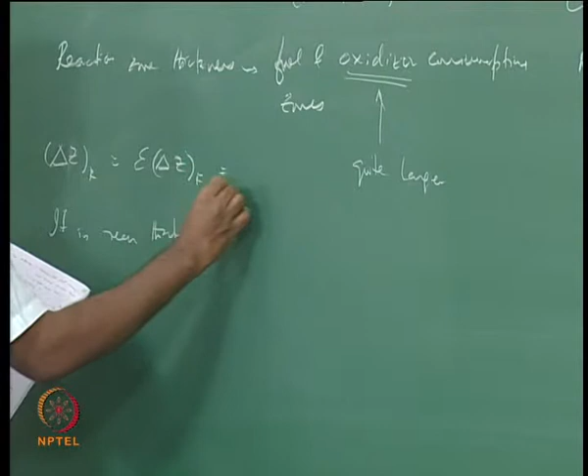Now what we know from literature on detailed kinetics, like diffusion flames with detailed kinetics, we'll just take this empirically here. It is seen that, let's call what we wrote here as delta Z epsilon. Delta Z epsilon is going with respect to chi_st to the power 1/4. This is actually from 4-step methane air chemistry calculation.

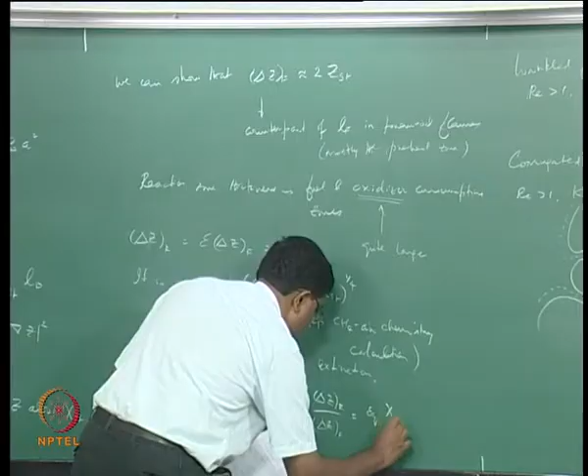And then we try to relate the epsilon here to the extinction epsilon. So by scaling epsilon with epsilon_q at extinction, we can show that epsilon over epsilon_q is chi_st divided by chi_q to the 1/4, and therefore we can just write here delta ZR divided by delta ZF is epsilon_q times chi_st divided by chi_q to the 1/4.

Now the reason we want to do this is it gives you L delta divided by LF, the counterpart in premix flames - what is the length scale corresponding to only the reaction zone thickness, L delta divided by LF. As I said, this is the counterpart of LF, and this is the counterpart of L delta from preheat zones. So we're doing something very similar to what we did for the preheat zone in premix flames.

So what we want to plot here is a fluctuation amplitude Z prime divided by the diffusion thickness in mixture fraction space, and on the horizontal axis we want to plot a measure of turbulence, which is the scalar dissipation rate at extinction divided by scalar dissipation rate at stoichiometric. Strictly speaking, we have to average this to indicate a Favre average - in fact, this is what's called a conditional Favre average of the scalar dissipation rate.

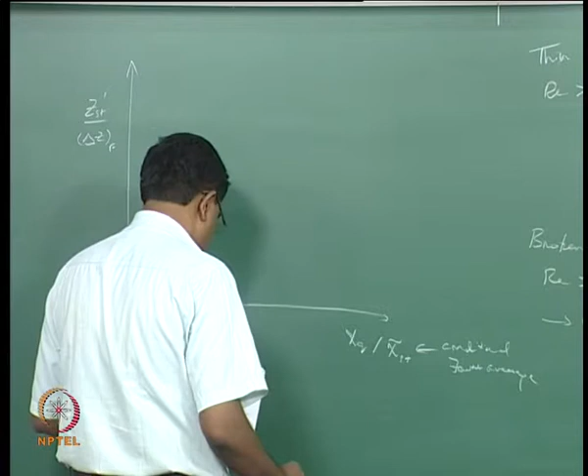Let's not worry about what it exactly means. For the moment, we will simply take it as of the same order as the scalar dissipation rate at stoichiometric condition. And I should also point out what is meant by this Z prime.

So Z prime is nothing but Z double prime squared tilde to the half. Double prime essentially indicates a Favre averaged fluctuation, so this is essentially a Favre RMS, a root mean square of the Favre averaged fluctuation. That's what it means. Similarly, when we say Z prime st, we really mean the root mean square Favre averaged fluctuations obtained at the stoichiometric condition.

Now let's put some numbers here on the axes. We can say 1, or 10 to the 0, 10 to the 1, 10 to the 2, etc. there, and then on the y axis we'll start with 10 to the minus 2, 10 to the minus 1, 10 to the 0, 10, 10 squared, and so on.

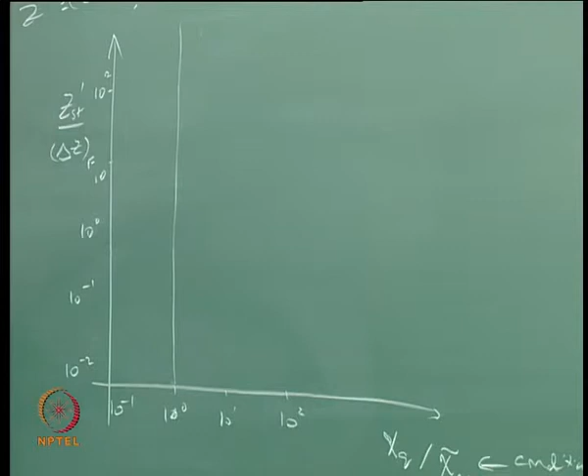What we should be interested in is a region that's greater than chi_q by chi_st greater than 1, because when you have a region that is less than 1, this is the extinction chi, so essentially this corresponds to flame extinction.

What we should be interested in, we should show this: we have Z prime st divided by delta Zf going as chi_q over chi_st. You can see that here. This is opposite, so you have a minus 1 over 4 in a log scale. Starting from here, you go through a line like this. This is Zst divided by delta Zr equal to 1, and this is slope minus 1 over 4. We are taking chi_st tilde as approximately the same as chi_st here, as I said.

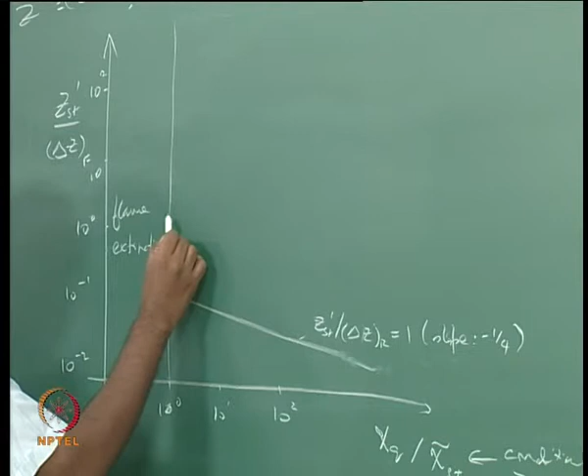And then you also have one more situation similar to previously, where we had u prime comparable to SL and Zst prime comparable to delta Zf, so that's here. This is Zst prime equal to delta Zf. That now breaks things up into four parts: one is flame extinction, then separated flames, connected flames, and connected reaction zones.

Right, so let's again explain these things. So when you have, for example, Zst greater than delta Zf.

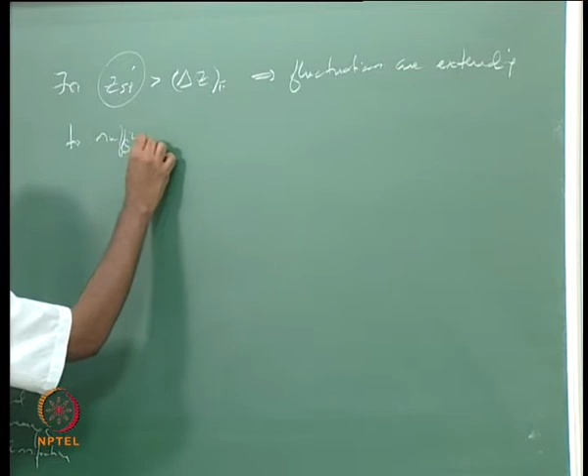Now what this means is you now have fluctuations that are actually greater than delta Zf, and delta Zf corresponds to the preheat zone. This basically means that fluctuations are extending to sufficiently lean and rich sides, and therefore the fluctuations are now causing some amount of the lean side of the flame to go to the rich side and vice versa. This begins to separate the flames, because the flames are effectively dictated by what's near the stoichiometric surface for the reaction zone, and if you have these things going on, you create intermediate regions of stoichiometric surfaces, so the original flame is essentially broken.

So this begins to cause separated flames — causes the reaction zone to get separated.

Now for Zst less than delta Zf, we do have intense mixing, but not enough to cause separation, and sometimes you can also get partial premixing. So what this means is you can have the reaction zone move around without really getting disconnected, but the preheat zone senses the fluctuations.

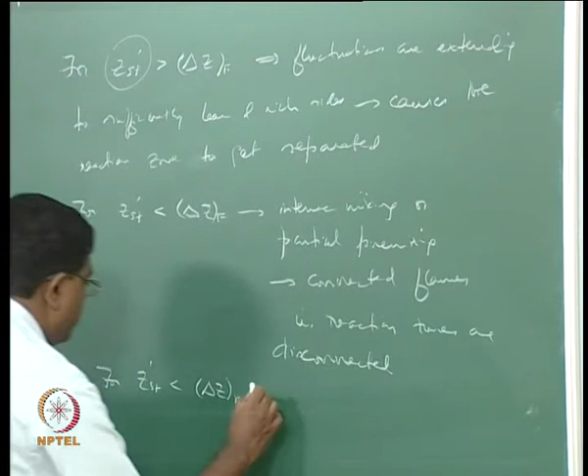So effectively then you don't really have disconnected reaction zones — this is essentially connected flames, that is, reaction zones are disconnected. And finally for Zst less than delta Zr, this begins to look like fluctuations are still smaller than the reaction zone thickness itself. Then even the reaction zones, I should say, here reaction zones are disconnected, but here even the reaction zones are connected.

Now it turns out you can sense all these things completely in a jet diffusion flame. So if you think about a jet diffusion flame along its axis, the jet diffusion flame axis actually goes through these different regimes as you go along and come down here. So you can see these different regimes exist in a jet diffusion flame corresponding to this. We'll stop here and pick up from here on some other day.